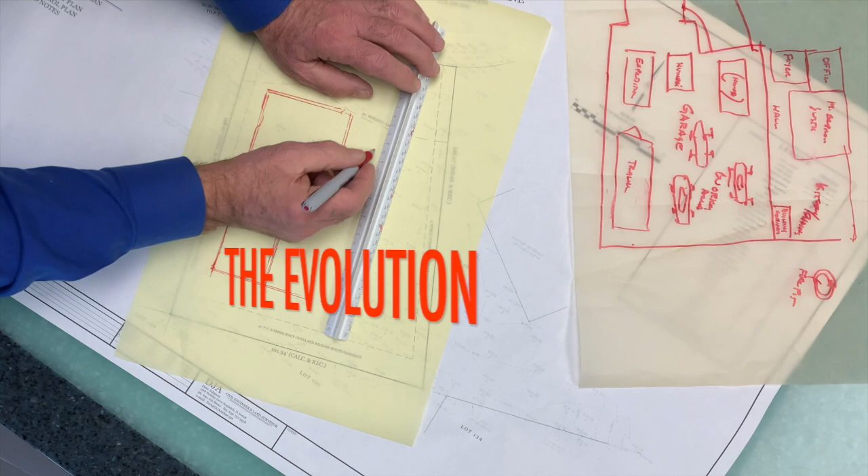Before we get started, I just want to give you a quick update on where we stand with the house. As you know, we got our building permit and had to have a pre-construction meeting last week with the building official. It was a great meeting, because the building code official didn't want anything to do with our superior wall system. Through a series of back and forth, giving them more information, he approved it, and this pre-construction meeting had more discussion about that than anything else. So we're good to go, and next week we'll start the excavation.

So let's look at how my house has evolved. We're going to start with the floor plans.

Now I wanted to show you the floor plan changes, and one of the main changes includes the elimination of the powder room. If you remember the previous plan, we had a powder room in the hallway here, with this hall bath and these two bedrooms. We felt we wanted to get rid of it for two reasons. One is cost basis, but that wasn't the major consideration. What we really wanted to do is open up this hallway, so as you enter the house through the pivot door, you've got a little foyer area here.

Then as you continue down the hall, we can locate some artwork on the walls and do some accent lighting to light it up. The intent is to be like a gallery, and as it is, it's probably a little narrower than I would like, but it will work out fine, especially considering the size of the house.

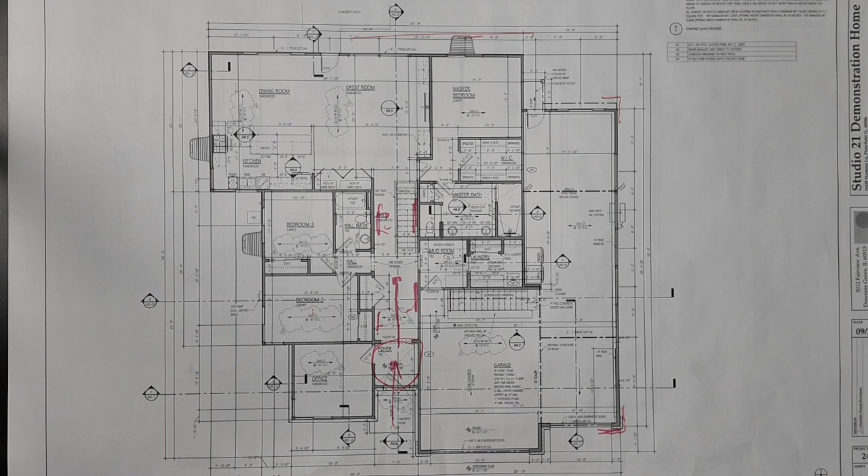One confusion we had was with our overhangs, which we showed as a small exterior overhang in previous versions. We found a part in the code where we were misinterpreting what they were asking for. So what we were able to do is call that open space, and if it's open space without any impervious surface underneath it, it can be larger. We've got a 12-inch overhang everywhere, but on the back side we're going to have a larger overhang because that's the south exposure. We want more of that sun shading effect in the summertime, so we can fully shade those windows at the hottest time of the year.

So hopefully the pivot door stays in the design, and that's this door right here. It pivots on a point, so as the door opens, part of it swings this way and the rest swings this way.

The important part is the threshold on that - it's an ADA threshold, which we want because of the accessibility we want in the house without steps. But they warn us about potential water intruding under that door with a heavy wind-driven rain. However, we've got a pretty decent sized overhang, so I don't think that's going to be a concern.

What we did then is said, okay, we want to do this area in tile, even though the rest of it was going to be a wood floor. We did that, and then having a transition, we created these little wing walls here, and created this foyer space that will have a ceiling that's kind of a pyramid coming down with a light fixture in the middle of it. That'll be a nice little feature happening in the entry of the house itself.

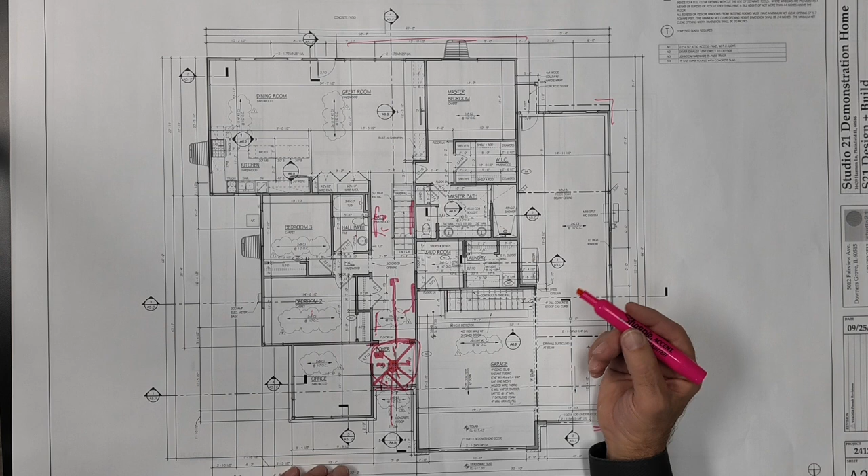So then moving on, we've reworked the master bathroom a bunch of times, and where we are on that right now is a big walk-in shower, no threshold. Everything will drain toward this drain on the end of the shower, and we'll have a shower head here and then probably a handheld shower where you could put a seat in if necessary.

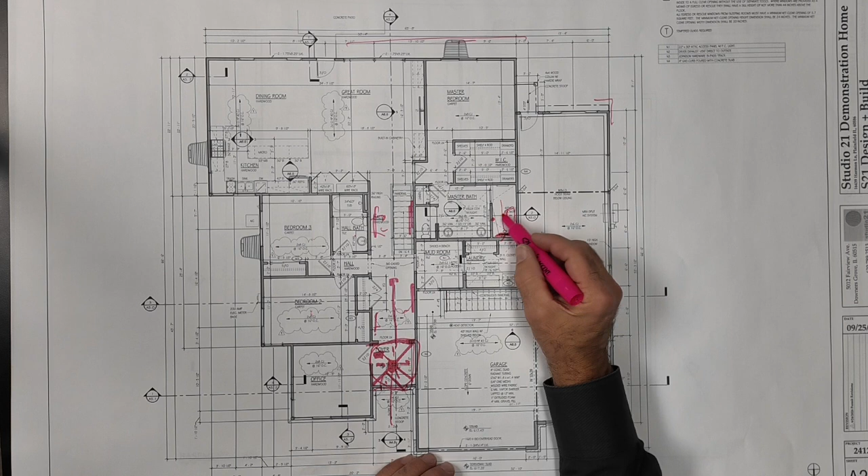This area here is going to have a skylight and the slope ceiling coming down, so this whole area will be lit with a lot of nice natural light. Same thing in the laundry room - skylight with a vaulted ceiling that goes up to it, and again, a lot of natural light.

I think we had the kitchen configuration the way it currently is the last time. So that kind of wraps it up for the first floor.

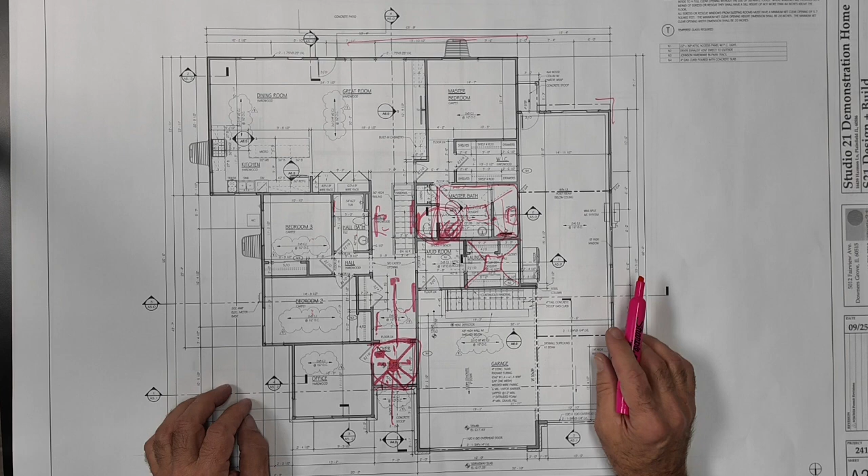Okay, so now we're going to talk about the basement - I don't think I showed that previously. So again, this area is not basement, this is the garage above. And one thing we did initially, Carrie's quilting room was kind of in this area here.

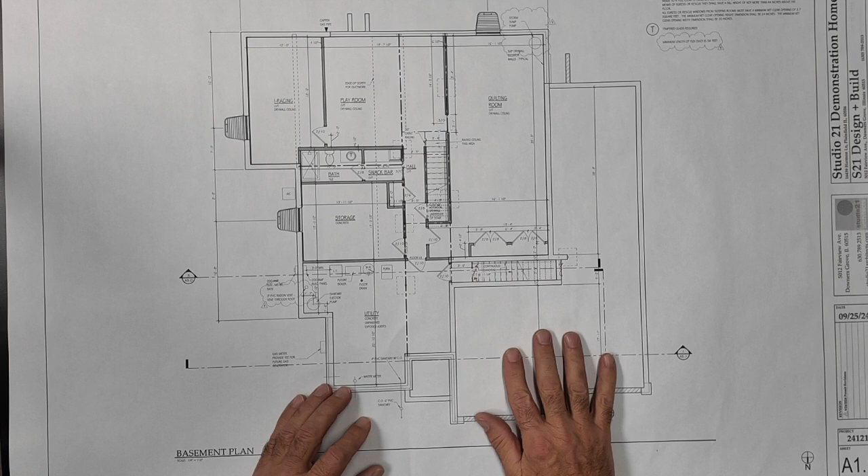We made a change a while back to make this quilting room much larger. So, you know, I've got my big ass garage, but she's got a huge, absolutely huge quilting room here. So, that's pretty cool that we were able to accomplish that.

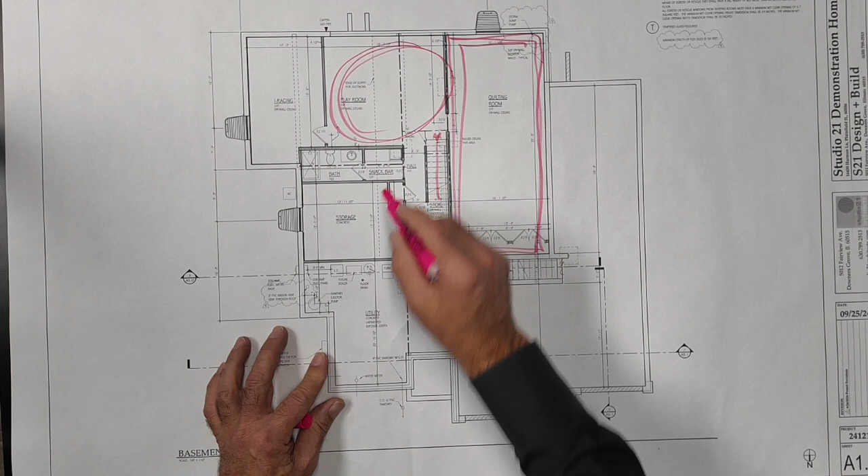And then coming down the stairs here, there'll be a playroom for the kids, grandkids when they come over. And then I've got my virtual racing room here in the corner. Everything else, I believe, in the basement has remained the same.

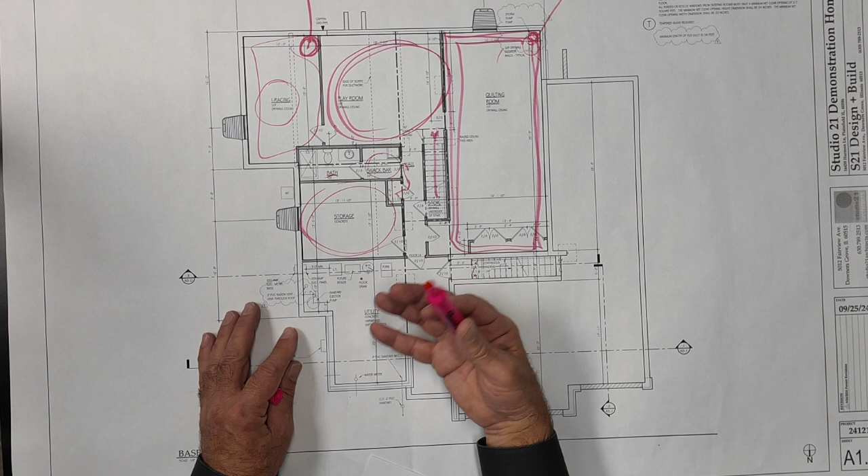We have our bathroom here, a little snack bar there, a closet, and then a storage room. This one will be drywalled and finished for kind of good storage - I don't know what you want to call it, but it's a neater storage. It's an area that's going to have drywall and ceiling and such. But then this utility area here will be for messy storage stuff.

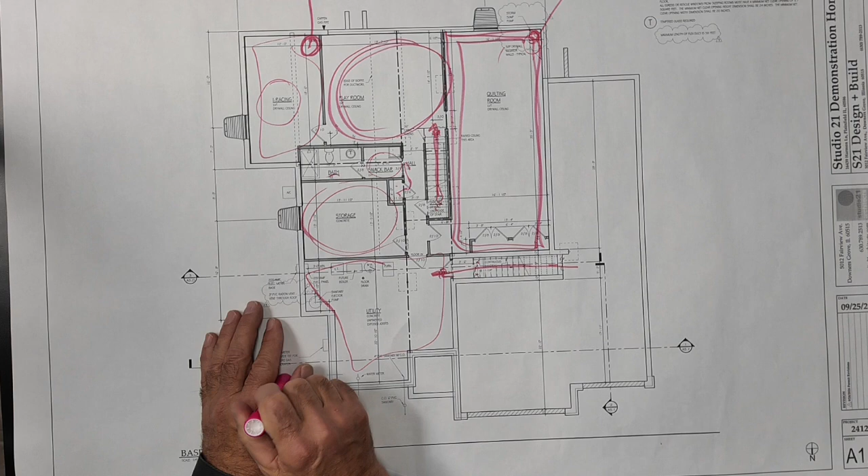And again, stair coming down from the garage above down into the basement, and we have this stair that comes down to the basement as well. So the biggest change down here is the configuration of these rooms. I think the bathroom at one point was over here - it's over there now.

So that kind of wraps it up as to some of the changes, floor plan changes. So with that, let's take a look at what the exterior looks like, and then also some other 3D images of the interior of the house. They aren't complete, but they're a good starting point for us to talk about.